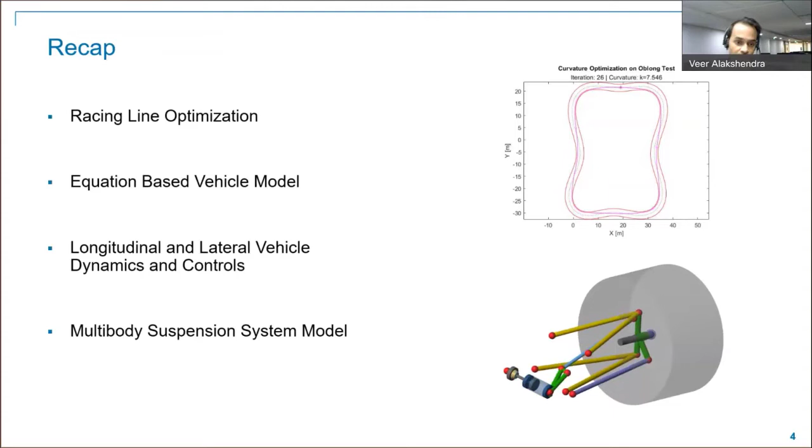So with this, we'll have an exciting and a little bit tight agenda today. So we'll be focusing on modeling of physical systems. Of the whole 1.5 hour session, approximately 50 minutes will be dedicated towards modeling of physical systems, wherein we'll see a very basic battery electric model with motor cooling, which will be based on the fundamental blocks.

And then we'll improve it a little bit, or you can say add more details to the model, where we'll be seeing how an electric vehicle can be powered by a BLDC motor. And then in Powertrain Blockset, which is also one of the toolboxes we have, we have multiple vehicle reference applications which you can use for your different design purposes.

So also, in that we'll check out one electric vehicle reference application. And then we'll see how Simscape, which is, you can say, equation-based modeling, and Powertrain Blockset, which is data-driven modeling, how you can integrate these two.

And then Krishna will come with his full vehicle simulation, and he has a lot to speak and a lot to show, and also he has a very nice introduction of himself. And then we'll share some resources, and then we can take some questions.

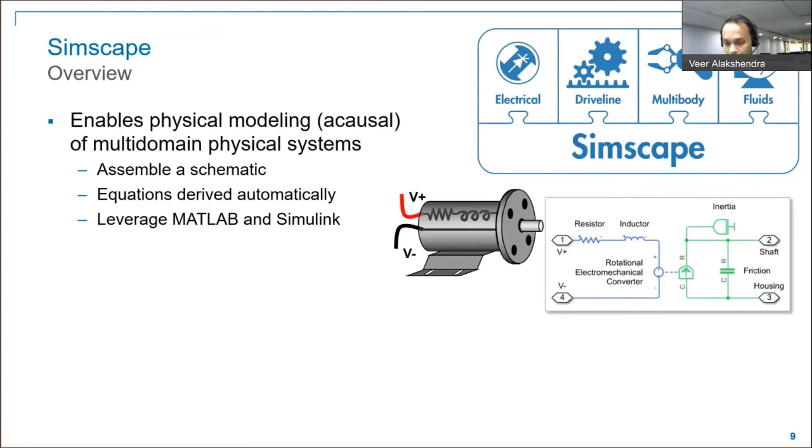As an example, here is a DC motor where you can see these elements. These elements already have the equations. You don't have to derive them from scratch. You can connect them the way you connect in a real environment. We are giving you a lot of different physical blocks in the Simscape library, and if you want to customize them, you can use Simscape language. For example, here we wanted a lossy ultracapacitor, a custom-made block, so for that you can use Simscape language.

So the important points are that it is mimicking the physical system layout in a simulation platform, which is Simscape, and there's an energy transfer involved between the components. Now, once we say energy, the energy flow in this physical system is dependent upon the across and through variables. Now, why are we telling this?

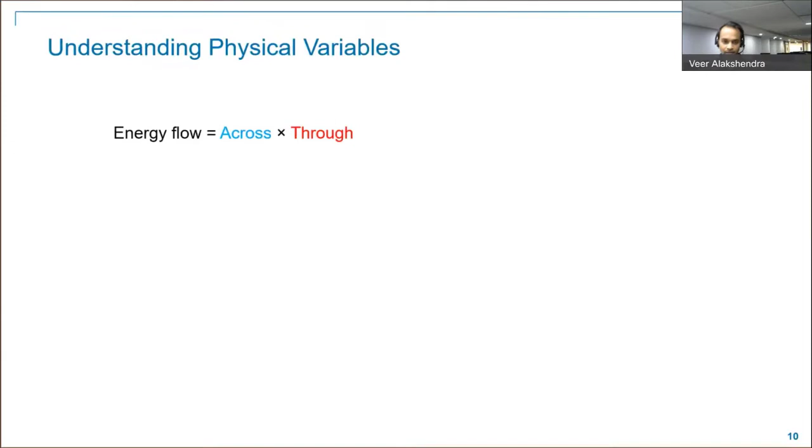Because this is helpful when you are making the connection, because it might happen that you want to sense something like torque, or maybe you want to sense angular velocity. In that case, how to do the connections? So across variables, if you want to sense that, that is connected in parallel, and through, that is connected in series.

So here's one example in electrical terms. Power in electrical terms can be defined as voltage into current, where voltage is across and current is a through variable. So when you want to measure or sense voltage, that has to be connected in parallel. And if you have to measure current, that has to be connected in series. Similarly, in mechanical terms, this power can be defined as angular velocity and torque. And now, if you're making the connection, this is how it will look.

So in the first top diagram, you can see that we want to sense the angular velocity, so these are connected in parallel. And then we want to sense the torque; for that, we are putting the sensor in series. So these are certain basic things, and a lot of other things are also there. Eventually, when we move step-by-step through different models, you'll get an idea, and we'll also share some resources.

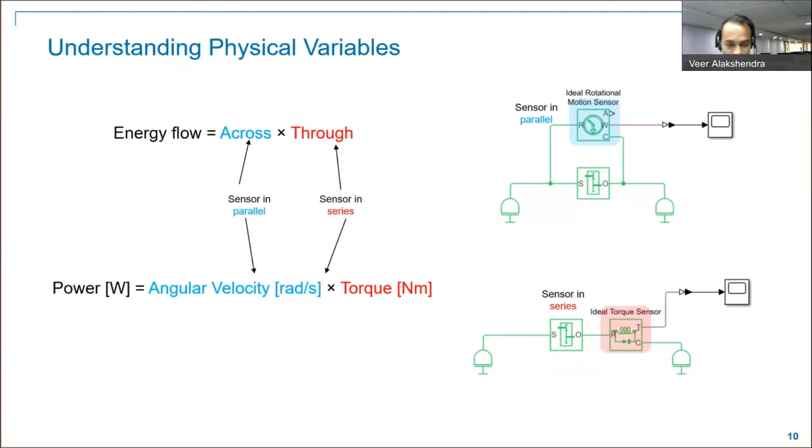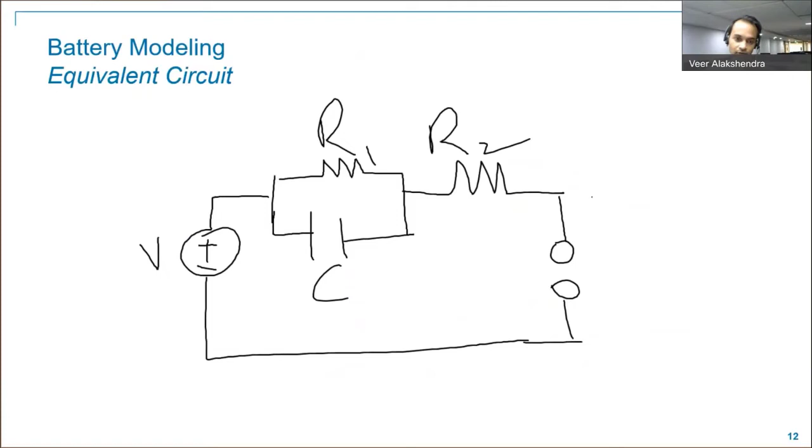Now, what we'll do next is we started with this equivalent circuit model. We are not going to deep dive into battery modeling, but with this problem statement or physical system layout, we'll see how connections are made, how easy it is to make the connections, and a few important things we have covered. Once we are done with this, we'll move to a live demo of an electric vehicle basic electrical model with motor cooling using fundamental blocks. So let's switch to MATLAB.

So let me go through the library browser first, where you can find these blocks. Once you open the library browser, you scroll down. Here you can find Simscape, and in Simscape you have driveline, electrical, fluids, fundamental library, and multibody. In the last session we spoke about multibody, and we touched base on driveline. Since we are looking into an RC equivalent circuit or a battery equivalent circuit, let's get into the fundamental library and see where you can find all those physical blocks or elements.

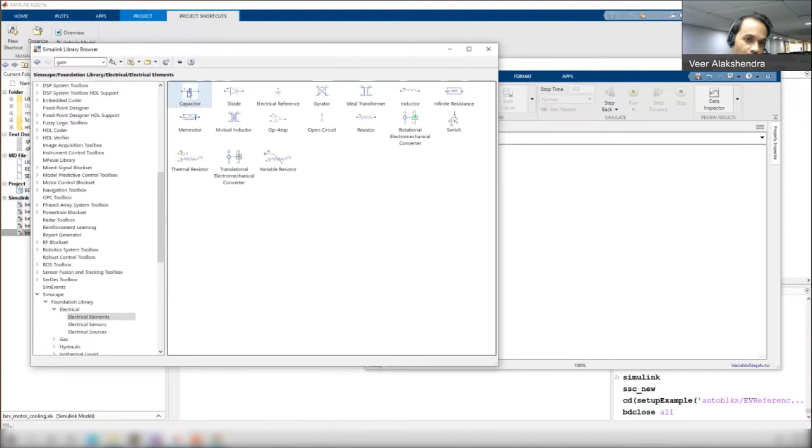So when you go inside electrical elements, you can see that you have these electrical elements: capacitor, resistor, inductor, which are all needed when you're going for this kind of circuit. So now let me do one thing. I'll just add the image in this blank canvas. So if I go to this, and

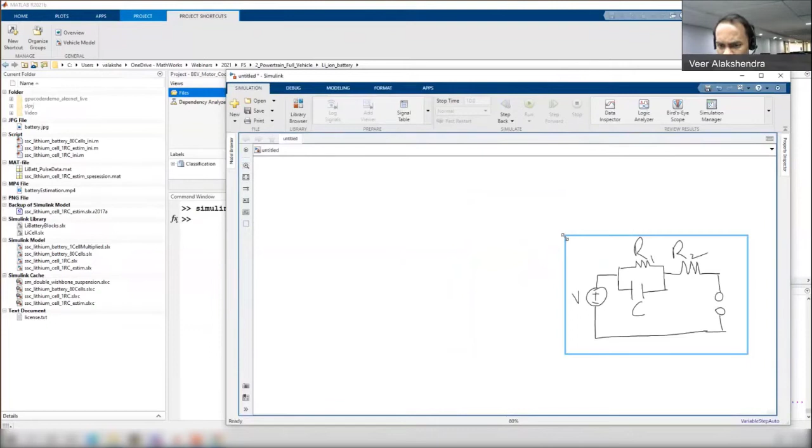So this is just a way to easily build any model. For example, if you are planning to make any model, like this battery or DC motor modeling, this is how the first step should be. If you have a layout of the system or an equivalent circuit, whether it is electrical or even mechanical, like a spring mass damper system, just keep an image, have the library on one side, and keep on adding the different physical block elements over here.

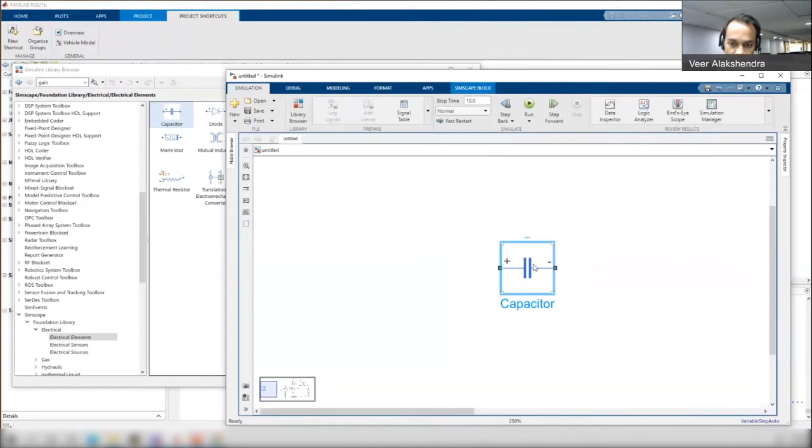For example, I just dragged in this capacitor, and when you double click on it, you don't have to define any equation. What you need to do is define the capacitance and different variables. And one more important thing: whether you use a mathematical modeling or a physical modeling approach, to get realistic results, how you define the parameters is really important.

We have seen students working on physical modeling who have a nice model with all the proper connections, but if you don't feed the correct parameters, it's hard to get proper results. And that makes sense for any kind of modeling method. So we'll bring in the capacitor. Similarly, we'll bring the resistor, and we'll make similar connections over here. Like this, and we'll bring one voltage source, and we'll simply connect it.

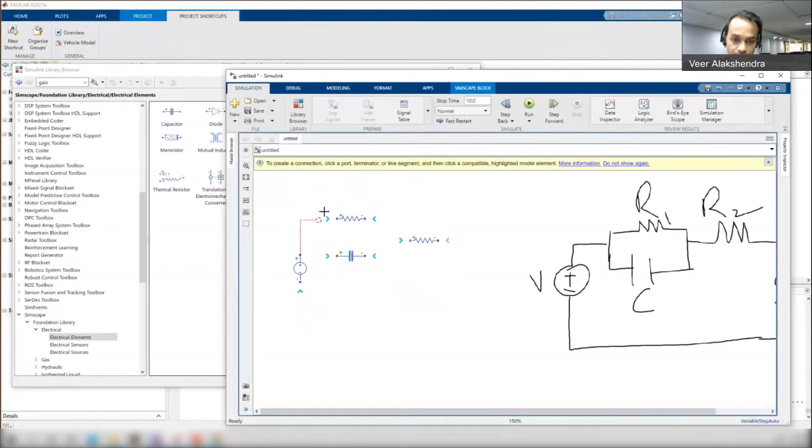So you can see that we're just mimicking or replicating the physical system layout over here. And then you need to just connect to the load. We'll see how we are connecting to different loads and full vehicle. So this is just an example of how easy it is to mimic the physical system layout

over here. So again, we'll take this as a motivation, and when we are moving to an electric vehicle model, we'll show you how, just with this equivalent circuit approach, we have built a whole battery pack, and then how we are simulating it with a vehicle dynamics model. Okay, so this is just a starting.

Now, moving to our main goal, that is modeling an electric vehicle. We'll start with a very basic model using foundation libraries. When I'm talking about the foundation blocks, these are all the blocks coming from here, the foundation library. So now let's move ahead and see what's the problem statement.

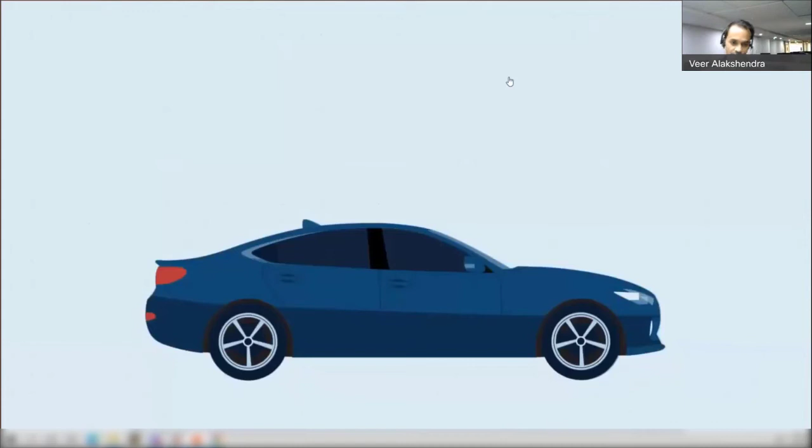So consider this vehicle, comprising a battery, a motor, and a gearbox, and it is driving the wheel, and when it is driving, it has the aerodynamic effect. Now, if you have this model, what can you do? First, you can size the components, estimate the battery performance, study the vehicle performance, or you can also design a motor cooling system.

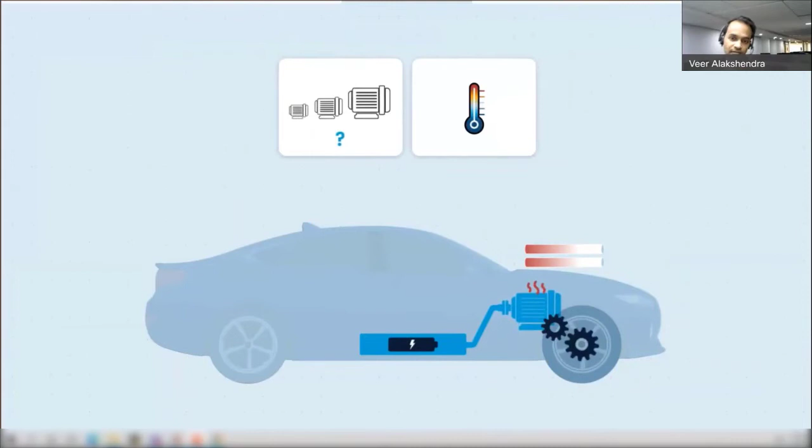So we'll be taking this as an example, and the scenario is something like this, where the vehicle aims to overtake this, and from here you will size the motor based on this scenario. And further, we'll also look into how you can build a very simple cooling system for the motor.

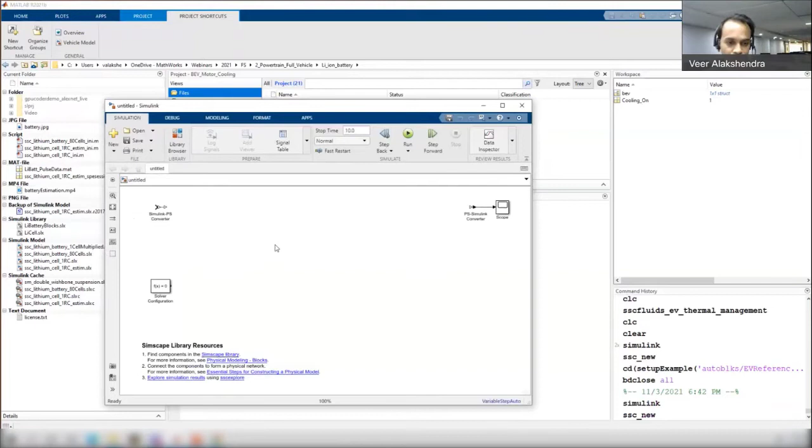So if you're starting with Simscape, either you can start with a blank canvas, or you can type ssc_new and open a canvas with some important default blocks which will be needed when you're modeling it. Okay, we'll come back to what all these are.

So you just saw the vehicle had one wheel rotating, some aerodynamic effect, and a gearbox. So we'll try to make this with a very simple approach. First, we need to rotate that wheel, right? So for that, we'll bring one ideal torque source, where C and R are the mechanical conserving ports. And then we have a simple tire, where again A and H are mechanical conserving

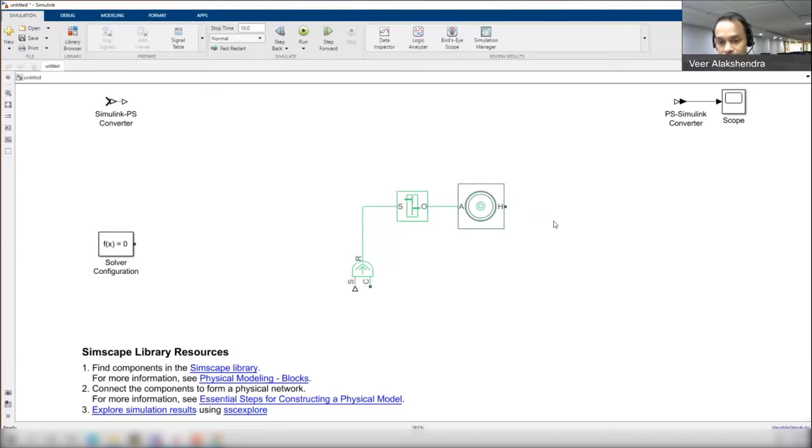ports. Now to vary the torque, we'll add one gearbox. We'll connect one port to the ideal torque source, and the other port of the gear will be connected to the tire. Now, to include the inertia, we'll bring one mass. We'll make this 2-port because we have to make some other connections as well. We'll rotate it and make the connection.

So as we are building it, you can see that we're just replicating the physical world. We want to rotate the gearbox, through which it will rotate the tire, and then we want to include a mass, which is the vehicle. So, a few things. We'll attach this to a rotational mechanical reference,

and then we have to add one constant over here, just adding some constant torque, not the signal, but it's constant. So now if you see over here, there's a change. What is the change? If I type constant, by default it gives you a Simulink block. However, as we already mentioned, these are all built using physical signals. That's why this is a PS constant, physical signal constant, which is connected to this ideal torque source.

Now further, we want to measure the velocity of the vehicle. So for that, we just bring one ideal translational motion sensor. Why? Because we want to measure the velocity. And then we again do the same thing. We connect the conserving ports.

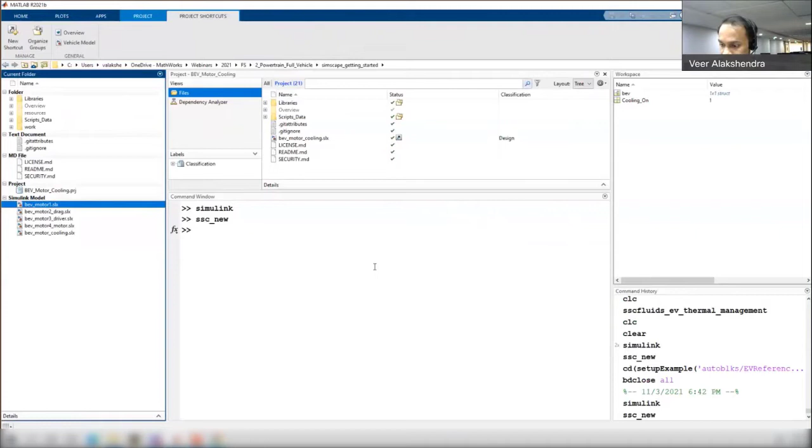Now, we already have the model with all the parameters, because if I again start adding the parameters, it will take a good amount of time. So I'll just close this one, and we will move back to the model which is already there. So now over here, you can see the same thing. We have this torque source, the gearbox, tires, chassis, and everything. Now let's run this model.

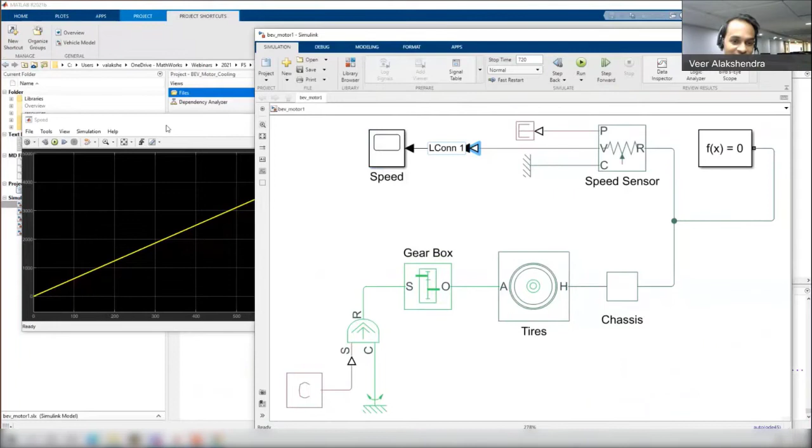So if you run this, you can see that the velocity is continuously increasing. And one more thing I forgot to mention is that when you're connecting these Simulink blocks to Simscape using these converters, you need to define the output signal units. For example, here we have defined kilometers per hour. And you can see that this is way too fast. You won't be able to drive with this velocity.

So now what is missing? We are missing the rolling resistance, the inclination effect in the vehicle, and even the drag. So we'll add two more blocks to include that resistance. Going to that model. So now with that improvement, we have added a block called translational friction, which is accounting for the drag. And for the inclination, we have added one ideal force source to which we are giving some constant value.

Now let's see what happens. Okay, one second. So now you can see that the effect is much better. After 400 seconds, you can see that the vehicle is approaching a constant velocity. What do you think? Is it fine, or do we need to make some changes? You can type that in the chat box.

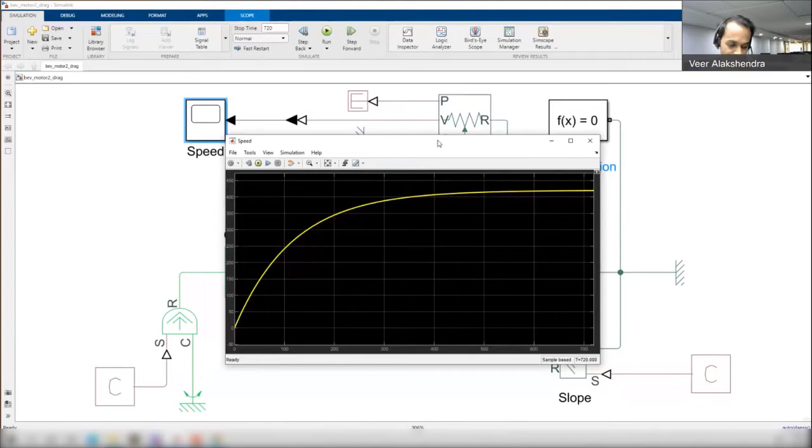If you're looking at the model and the results you're getting, what do you think could be wrong in this model, or is everything fine? Gear shift effect. Okay, Aditya says gear shift effect. Okay, so what is the effect of suspension? Yeah, coming back to the suspension, we have not added suspension, but still, at your basic modeling, you can add a few more things. The major concern over here is this part. You can see that the vehicle is moving very fast.

So if you remember the scenario we are talking about, the vehicle has to overtake the other vehicle in one lane and come back to its original lane. So here we'll try to control the speed. For that, we'll add one driver, which is dedicated to that kind of overtaking.

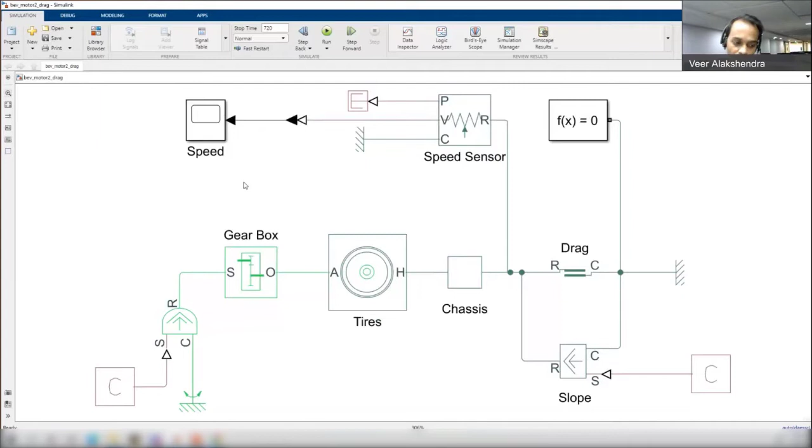So going to that model, to the driver, over here, just so that you don't confuse, this driver model is not a part of any toolbox, or not a part of any Simscape block. It is just created using Simulink blocks. So if you go inside this, the task is controlling the velocity. Now this driver model currently has 200 Newton meter torque.

Now let me run this first. And now you can see that, to some extent, it is fine. It is having 100 kilometers per hour over here, and then it is increasing the velocity when it is overtaking, and then it is coming back to constant.

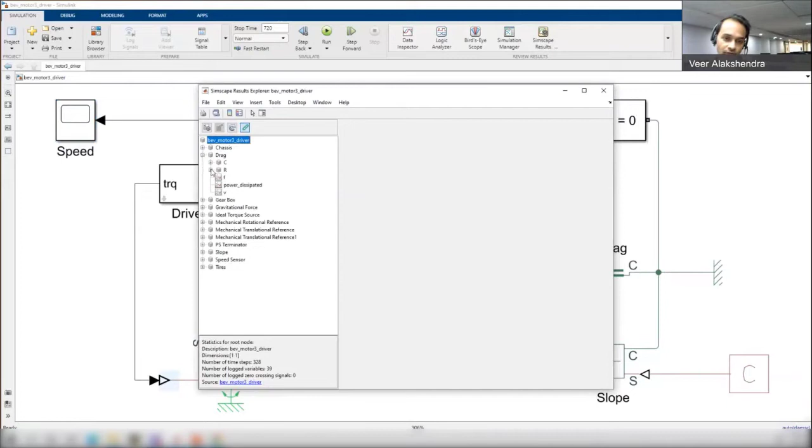Okay. Now, coming back to the component sizing and selection, which still is a question: if you want to select a proper component or motor for this, you have to visualize the torque. What is the torque output? For that, you can use the Simscape Results Explorer, where you can explore the results from different Simscape blocks with respect to time. So if I go to gearbox, and let's expand it.

Okay, I closed that window. Okay, let me again start that. So over here, you can see that it is taking close to 15 seconds or 14 seconds to overtake, which is a good amount of time.

So the first problem was controlling the velocity, which we did by just adding one driver. And then if you want to reduce the time to overtake that vehicle, let's increase this torque. So if I increase this torque and run the model, and then again visualize the results, let's see what happens. So now you can see over here that this is much better. Now it is taking less than 4 seconds, which is perfectly fine.

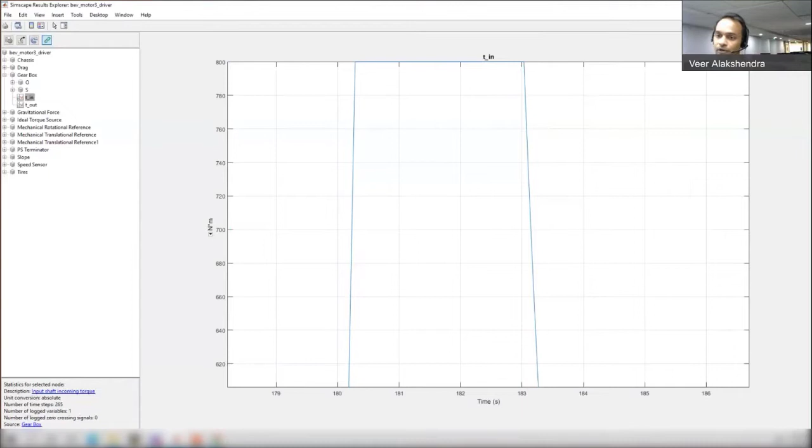Now the whole conclusion of the story is that when you have certain targets to achieve, based on that, you can build the model, and then you can size the components. There could be a lot of other parameters; I'm seeing in the chat people mentioning drag, then lateral dynamics. There's a lot going on. But overall, this is the procedure when you're looking for component sizing and selection.

Now with this, we understand that we have to select a motor which has a maximum torque of 800 Newton meter. So that's what we did. In the next model, we have added one motor, wherein you need to define certain parameters. This motor is designed based on velocity and torque. Once you have defined them and run it, you can see that it is within the range, below 5 seconds, and fulfilling all the requirements.

So we started with a very simple basic model. It is still a simple basic model, and we saw how we decided what the specs should be for the motor selection. So this is one part of the model. Now, okay, there are a lot of questions.

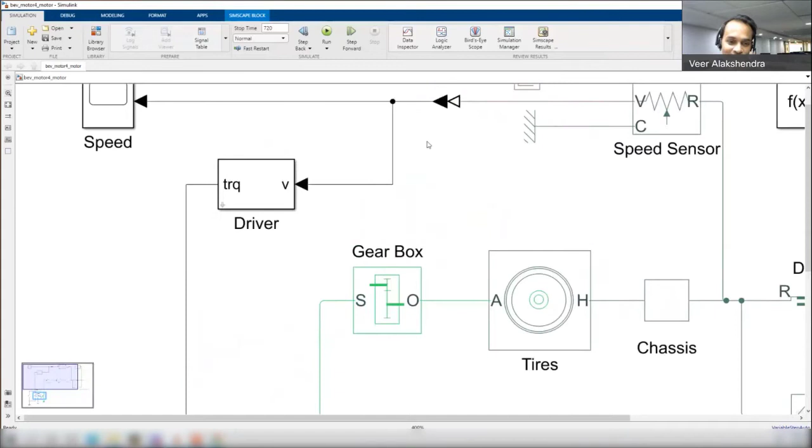Okay, one I can take. Why connect driver between scope and PS converter? This question was asked, I think, two times. The reason is that this is completely built in Simulink. So we want to input the Simulink signal, which can be done using this converter. And again, we want to give back to the motor over here, which requires the torque as a physical signal. So that's why we are using another converter, the Simulink to physical signal converter. That's why we are connecting it.

So you can definitely keep on asking questions. Once we are done with the session, we can come back and go through them. So having said that, we just saw the model, and now another task which we already spoke about was how to add the thermal effect, or how to design a cooling system.

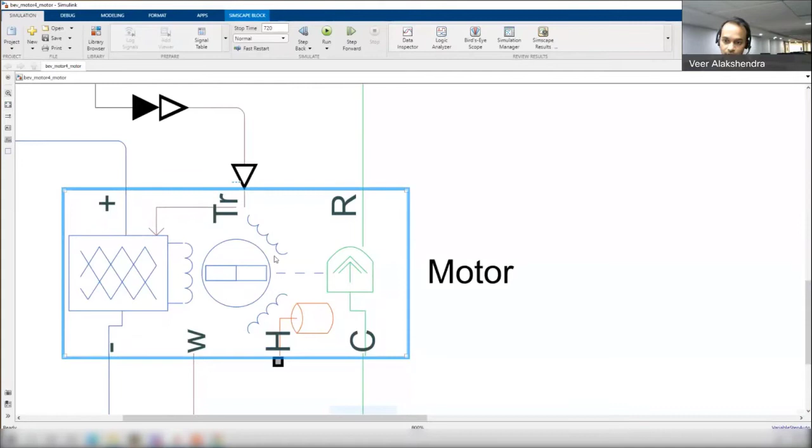Now, at least even if you're new, you got an idea that what you see in the physical environment or real environment, that's what we are trying to replicate over here. So with that learning, and one more hint I'm giving over here: this H port, what you see on this, is the thermal port. When you double click on this, you need to define certain things like thermal mass and initial temperature.

So now suppose we want to add one cooling system. What components would you need? Or maybe before that, what kind of different heat transfer will take place from the motor to the environment? What are the different modes of heat transfer? If you have that answer, I think it's very easy to understand when you're modeling the physical systems.

Okay, Mayur says convection. Okay. So there's one interesting answer: conduction and convection. Nice. Just on a simpler note, I think most of you are correct. Of course, convection will be there because it has to dissipate the heat into the environment. Through the fluid state, it will be convection.

And then conduction will also be there because the motor will be in a certain casing. That is heat transfer through a solid medium, so it will be conduction. So when you're adding that thermal effect, it will have conduction as well as convection. With that, we'll go to the final model and how it looks.

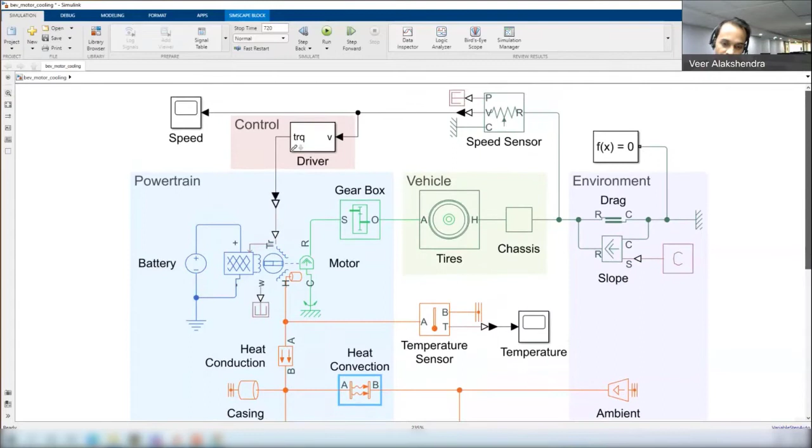Now further, to cool it, here we're talking about liquid cooling. So what we have done is we have added two pipes. This is a pipe casing which is connected to the casing over here, through which the fluid will be going, and then to dissipate that heat, we are connecting that to the ambient temperature, or you can say the atmosphere.

And then there are certain blocks for the tank and pump, and to define the fluid properties, we have one more Fluid Properties block. Now, once you run the simulation, what you see over here... Ahmed, can you send the model? Yes, we'll send the model. We'll show you something interesting, where you can find the model.

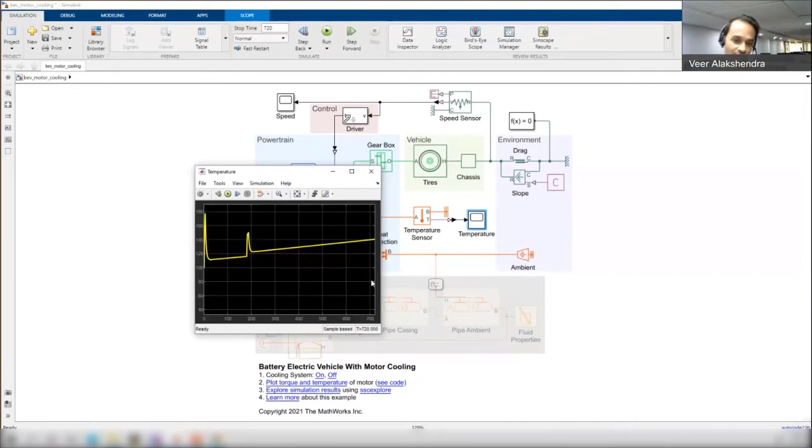Now, I just switched off the cooling system, and let's check out the temperature. If you have some threshold value, something like 120, you can see that it is crossing, and the temperature of this motor is increasing as time increases. Now, when you add this cooling system, let's see what happens.

Meanwhile, there's one question I can answer: what Simscape libraries are needed for the model with cooling. Along with what you saw, we made some blocks using the fundamental libraries, but otherwise you need to go into Fluids and check out these blocks, where you can find these pipes and all. So now I switched on that cooling and you can visualize over here

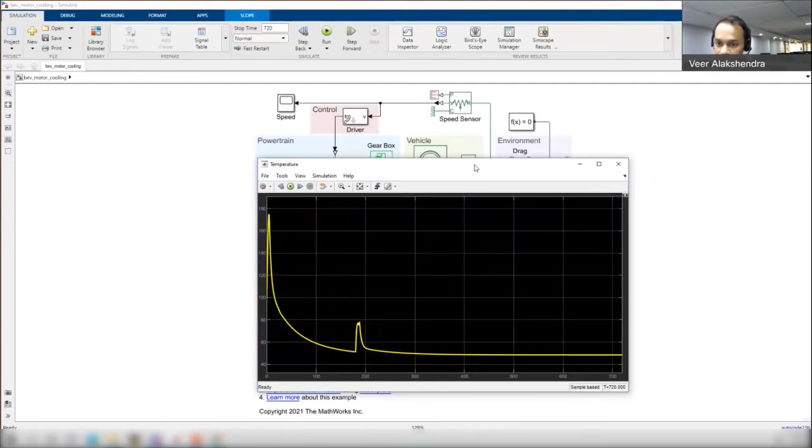that this is within, okay, no, not this. So now you can see that this is below the threshold point and we are able to cool the motor. So this is, I would say on a very basic level, the model. And now we'll move into a more detailed electric vehicle model where you will see how we are adding a specific motor and battery as well.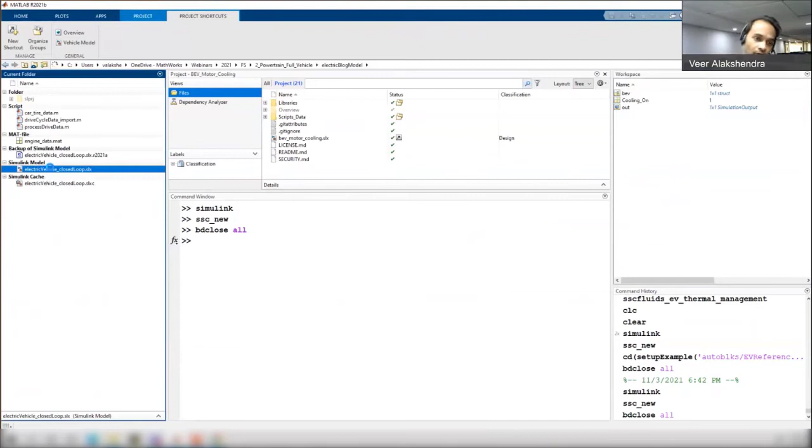Okay, so yeah, we'll just quickly run over one more model which has more detailing, because when you talk about the electric vehicle model, you have DC-DC converters, you have motors, specific motors.

So now you can see over here that when we go to the vehicle block, we are not modeling it using mass and drag using a friction block. Rather, we have a dedicated vehicle body block, where if you double click on this, you can see that this block is incorporating the equations, which have mass, number of wheels per axle, CG height and everything. Now, it also takes into account the drag, pitch, and all.

So this is one block, and then it has certain connections for the tire blocks, the brake as well, and putting an inclination. Now, with this recent release, we have one more interesting block in the driveline, which is called longitudinal vehicle, which also incorporates the tire effect. So you don't need to separately connect tires like what you saw in this model. Okay, so you can also have a look into this one.

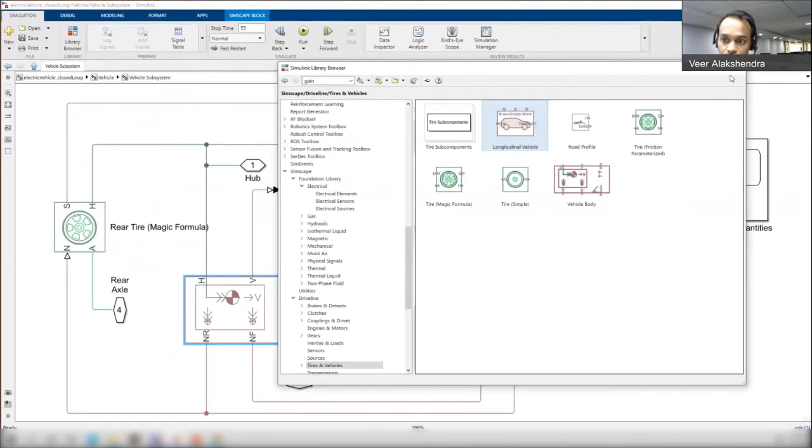And further, if I go ahead, you can see gear systems, which are modeled using these friction clutches, and based on that, we have certain logics. And then as we mentioned, the battery pack. So if you go over here, you can see how we have utilized an equivalent circuit model to make one cell, and then we have connected that to make a whole battery pack.

Okay, just to confirm, is my screen visible to everyone? Okay, so you can see the screen. Okay, fine. Okay, perfect.

So we're talking about the battery model, how we utilize the single cell equivalent circuit into a whole battery pack. And then coming back to the motors, now we are not using the motor which is built using torque and velocity values. Rather, we have a BLDC motor. Similarly, you can have PMSM motors also. You can check the Simscape library and see what other motors we have.

And then we have also built one DC-DC buck converter to step down, and then a three-phase inverter for this one. We're controlling the switching pattern using commutation logic. So from a learning perspective, you can start with a basic model, and then as you proceed further and understand the concept of physical modeling in Simscape, you can add more details into the model.

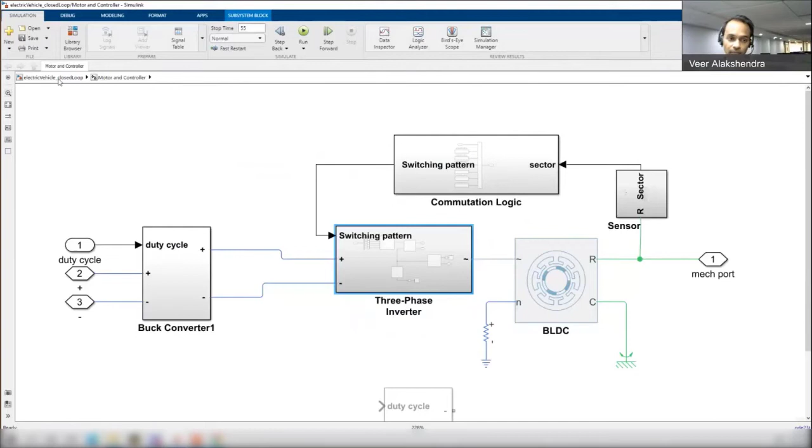Now, how can this model be used? For example, in Formula Student competition for component sizing and selection, if you are sizing your battery or selecting your motors, you must have some kind of drive cycle. You can have that drive cycle over here, add one controller, which could be a simple PI controller, and then you can see whether the powertrain you designed is able to track that velocity or not.

Similarly, you can also optimize it. For example, you can run certain optimization to find the parameters of this motor. So we wanted to show over here how you can increase the fidelity. And if you want more high fidelity models, we would recommend you check out this resource, the Simscape vehicle template. We also spoke about this, and we took one model from this and demonstrated it in the last session, the suspension model for the Formula Student teams.

And you can get a lot of information from this, because it includes one axle, two axle, multi-axle vehicle models, with powertrain and vehicle dynamics as well. Okay, so you can explore this. We have provided the link over here, and feel free to use these models for your specific requirements.

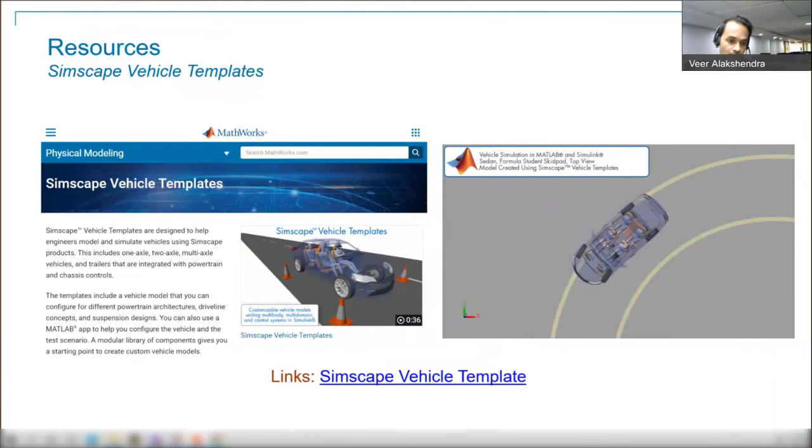Perfect. So quickly, what we will do, since we don't have much time and we have to give it to Krishna: until now, we just spoke about the concept of physical modeling. We also have one more tool called Powertrain Blockset, with the goal of providing a starting point for engineers to build good plant and controller models and provide open and documented models.

For example, this toolbox has a good amount of reference applications. You can use those reference applications by changing variables, or if you want to make any changes to any of the blocks, these blocks are all open. And of course, for those who are looking for HIL testing, it provides very fast running models for that.

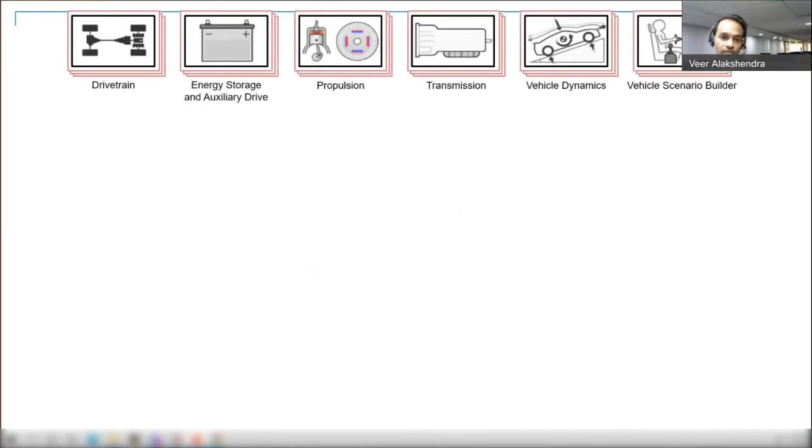Now, what is this Powertrain Blockset? It provides you different libraries for drivetrain, energy storage, propulsion, transmission, vehicle dynamics, and vehicle scenario builders. And you can combine these models to, for example, build one engine model, and then that subsystem can be added to a complete full vehicle simulation, and then you can visualize the results or do the analysis part.

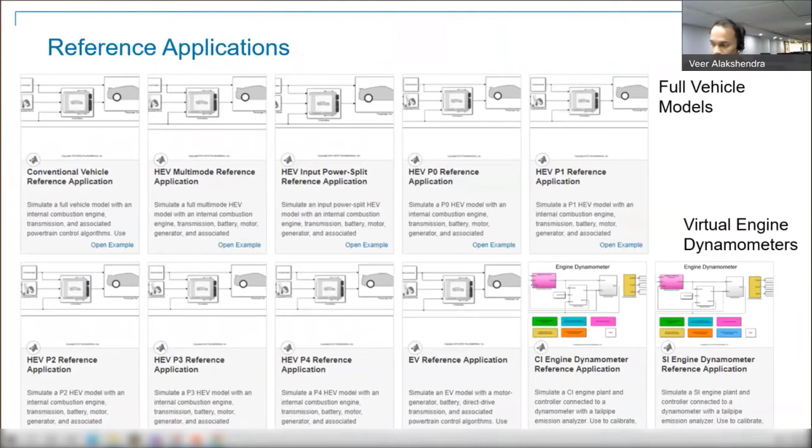So these are the whole set of reference applications over here. These are full vehicle models, and we'll just check out one example, the electric vehicle one. And if you are looking for virtual engine dynamometer testing, you can also check out these reference applications. One is for CI engine and another one is for SI engine. So I'll quickly just open this model and show you how you can leverage this model for your specific requirement.

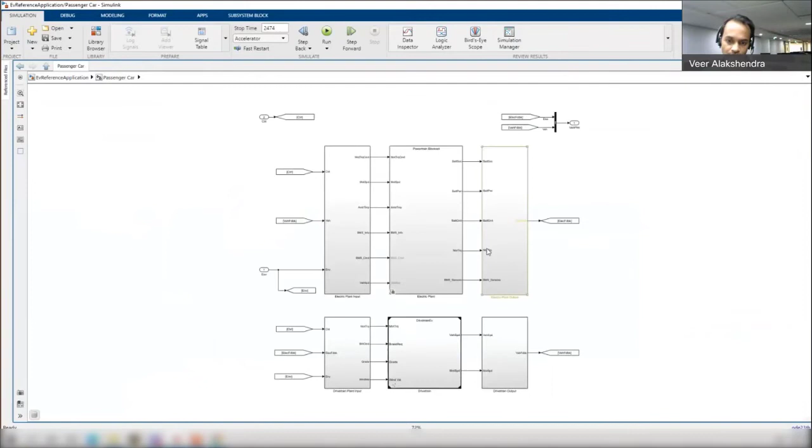Yeah, so this is the model. What you see over here is it has a passenger car with different subsystems. And if you go to the passenger car and you go to the electrical plant, you can see how the powertrain has been built using blocks from Powertrain Blockset. For example, if I just take the example of the battery, this is the block which is present in the Powertrain Blockset. Again, over here, these parameters you need to define to model the battery.

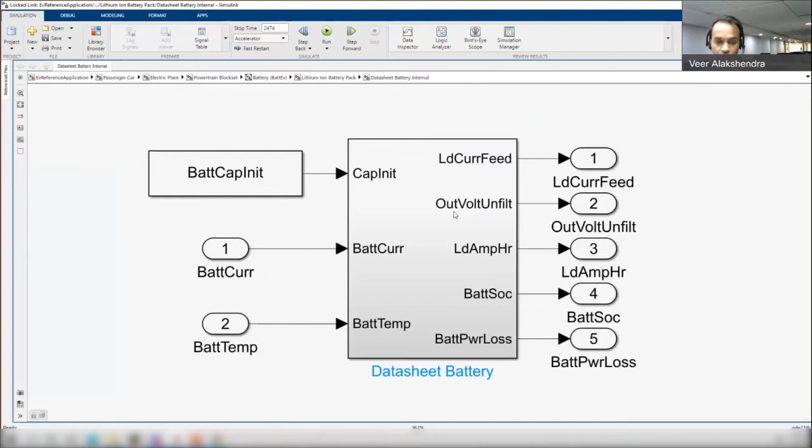And just to remind you again, these are not physical signals. These are based on Simulink, based on equations, and you can see that they have directions, so you can say input signals and output signals. Now, if you want to change it, visualize what is inside, or customize it based on the existing blocks, you can simply go inside, press Control U, and see what equations are being used. So it's completely open. You can modify it, or directly use the reference application. Similarly for the other components as well.

Okay. So now this model, if we run it, will take some time. Since we don't have much time, I'll just quickly mention that this is a closed loop model. It has a reference drive cycle, the FTP75 drive cycle. For this, we are running the model, and you can see how smoothly it is tracking, and then you can also calculate other parameters like state of charge for this electric vehicle model.

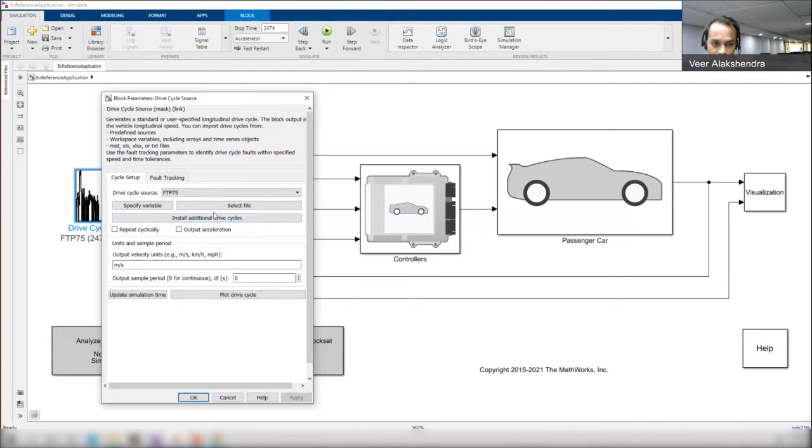And we often get a lot of questions regarding whether we can have other drive cycles. So if you just click on this install additional drive cycles, it will route you to one of the support packages or a submission on the File Exchange. From there, you can get more drive cycles for testing.

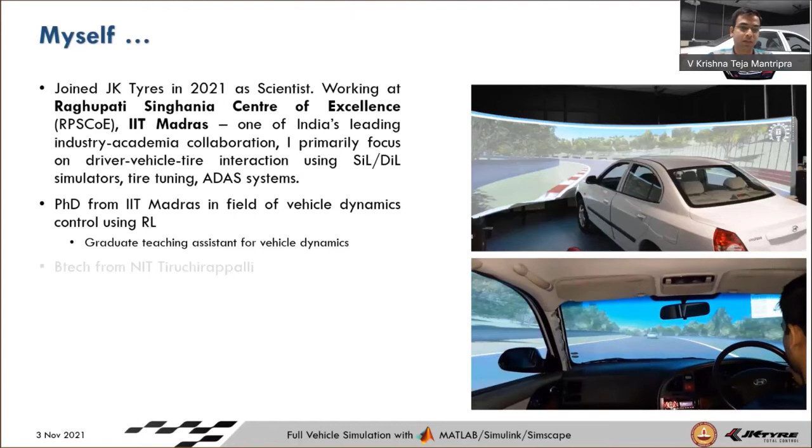So just to give you a feel, this is a view of our lab, and at the bottom you can see me driving the hardware in loop, or basically you can call it a driver in loop system as well. And the car that you see behind is the same thing basically. But this requires extensive parameterization, extensive modeling, and all that stuff. And these are some of the things that we are going to explore in the forthcoming slides. In a few minutes, we're going to see that.

So Veer has already given you a very good basic understanding of the difference between equation-based, that's on the left side, and physical model, that's in the center. But the physical modeling is again categorized as 1D and 3D, because in 1D you do not have gravity or any other inertial effects and so on. So that is where we go into 3D to model even more details, in combination with 1D simulations as well. So this is what we're going to explore more in detail.

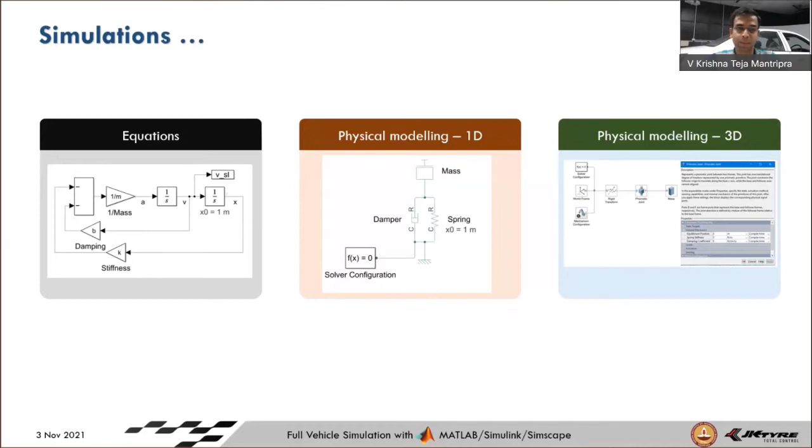So the simulation model has all the subsystems that you see, from the chassis, the suspension, tires, brakes, steering, maybe power steering as well. Today everything is electronic power steering. If you go to German vehicles, European vehicles, they do not have a mechanical steering as well. It is called steer by wire. So everything is replaced by wires. So how those can be modeled. And powertrain is already covered, so I will just go through the basics.

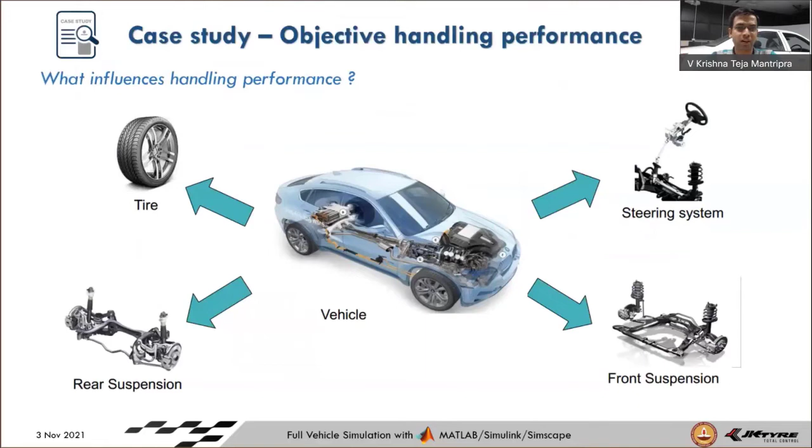And formula students might be interested in aerodynamics, so I'll just give you a brief of how you model aerodynamics. Extensive modeling can be done, but here I'm going to just touch the basics. So to give you a feel, I'll first run you through a case study. The case study is regarding objective handling performance. Handling is extensively dependent on these subsystems: tires, suspension, and steering system, of course. Vehicle level parameters and other parameters are not very well felt, but these are the main parameters.

So for these performances, for example, a new tire is going into the market or a new vehicle is going into the market, it needs an extensive validation, not just on the sensor side, but also the physical feel of the driver, that is, the subjective rating which the driver himself gives. So we require different metrics from individual components, and overall metrics of the vehicle itself. And the challenges are pretty big. We need a full vehicle CAE simulation and overall process efficiency in data collection, modeling, simulation, testing, and so on.

The biggest challenge is which physics to model and which we can omit. So the trade-offs are huge. These are the things that we need to address before. And once these are done, we can actually have a correspondence map, like which performance metrics are affected by which parameters. That is what we are going to see in the course of this presentation.

So first, we are going to measure the tires. On the left, what you see is called a traction trailer or skid trailer, which measures all the tire forces and moments under different conditions. This is a skid trailer that is available in India. It is the first that we have purchased and we use it extensively for tire measurements. Next, from those raw data we estimate all the tire data, again using MATLAB, as it has extensive optimization and estimation techniques and codes built in, so we can directly leverage them. Finally, we perform the simulation, full CAE simulations, as you can see on the slide.

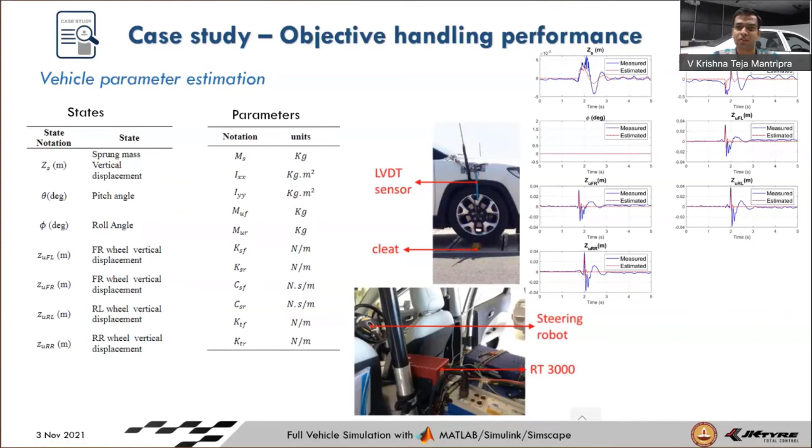The next important part is the steering estimation, where the models are quite obscured, because it requires a lot of custom models to use them. I'll explore some of them during the course of the presentation. How can you model such things in MATLAB easily, again without having to worry about a lot of equations? Simscape is there to alleviate you from all of this.

So the blue one is on-the-road testing, and the red one is from the simulation models that we do. On the right side, what you see is a steering robot, which gives specific inputs repeatably on a test track.

So with the mix of all these things, now we know the tire parameters, the vehicle parameters, the steering parameters. So it is like we are making a digital twin of the complete vehicle system. Only once we have all these parameters can we actually verify or validate vehicle-level data. For example, here it is lateral acceleration versus the steering wheel angle, with different tires; if tires change, the behavior also changes.

On the right side is the same car you see behind. So you can sit inside and drive, the driver actually drives, and we can mount the same steering robot to repeat all the tests in the hardware-in-the-loop system. So we can have a very good correlation.

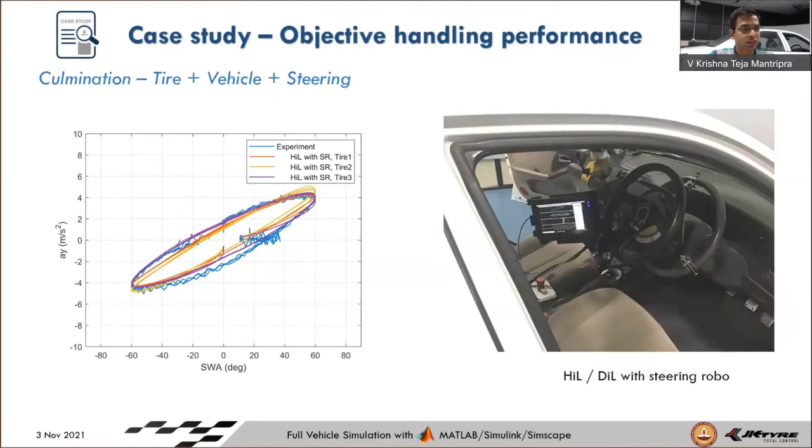Krishna, you can see the chat, right? I mean, what they're writing as answers? Can you see? The chat is not visible for me. Oh, okay, no issues. So we got two answers. Yeah, I think the screen has slipped up. Okay, fine, you can see it, right? Okay, fine then.

Yeah. So on the right side, the second graph, what you see is the steering handwheel versus lateral acceleration. So there are a few thumb rules. If you are in a racing team, you might know many of those things. One thumb rule is that at a certain speed, if you give a certain steering angle, it should reach a certain lateral acceleration. For most passenger cars, the thumb rule is at 60 kmph, near 60 degrees, you need to be able to reach about 4 meters per second square, 0.4 G.

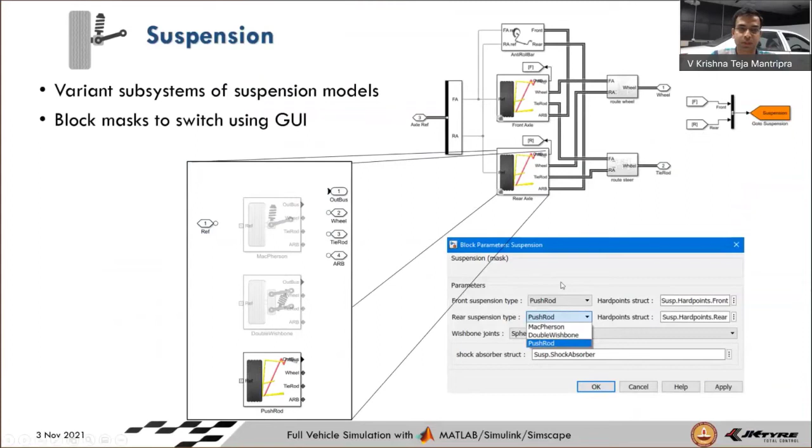So how do you model these suspensions? This is a schematic diagram that we have. If you closely look, we have an upright, two wishbone pairs, one at the bottom, one at the top. Near the lower wishbone, we have a push rod coming up, hinged at a point here that is connected to a shock absorber. This yellow and pink combination that you see is the steering rack, which will come in a minute.

And the green one that you see is an anti-roll bar. Of course, this is one type of anti-roll bar. You might have something embedded within the chassis itself, but for simplicity, let's have this one as the anti-roll bar. So these are the bodies that you know. And now intuitively you know that each of them have certain degrees of freedom. For example, the wishbone can move in certain directions or can rotate in certain directions.

So you need to use a ball joint. Typically ball joints are used. You can use even revolute joints. Simulation speed will vary because, if you studied multibody dynamics theory, you know that some of the constraints you can remove, and the results will be pretty much the same. So if you can properly translate the 3D coordinates, you can use either a ball joint or a revolute joint.

Bushing joints can be used. That means all 6 degrees of freedom can be used to additionally model the vibrations, but simulation time will increase. It is called judder, because of variations in road surface, tire forces, and so on. You feel the vibrations, which the driver feels in his seat and through his steering. All those can be modeled by using different degrees of freedom. All of those degrees of freedom blocks are available in Simscape Multibody. So that is about the wishbones.

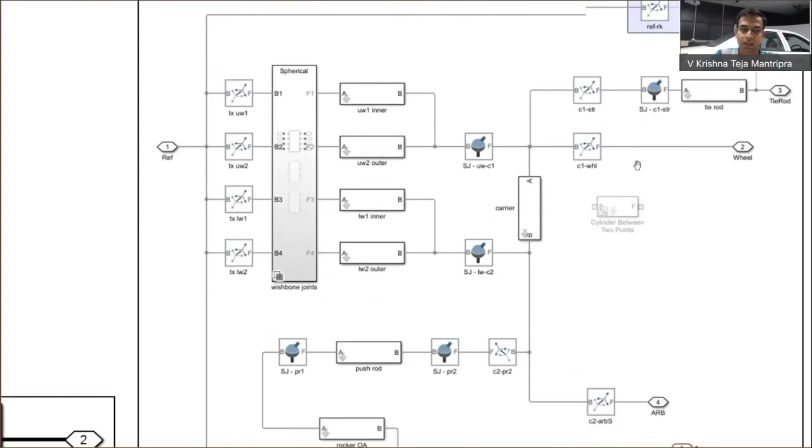I have the wishbone rods, the yellow rods that you have seen in the previous slide. They're connected to, again, either bushing or spherical joints, because on the upright you need them to be connected. So that is the carrier or the upright, connected to the tie rod of the tire, that is the steering. And connected is the push rod.

So you have the push rod; because it has rotational degrees of freedom, you have again spherical joints connected. There is a hinge in between, that is the rocker, and at the center of the rocker again it's a revolute, because the rocker does not rotate in other directions. It rotates about only a fixed axis. So you have a revolute joint there. There are 2 arms for the rocker, upper and lower, so you have 2 of them.

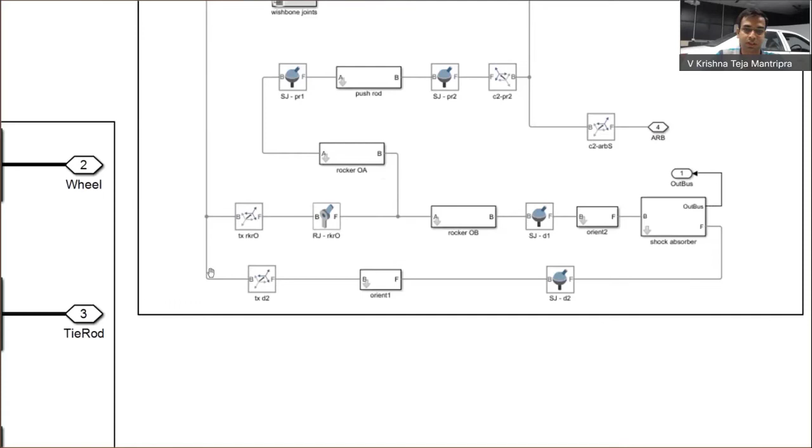It's connected to the shock absorber again via a spherical joint. The other end of the shock absorber is fixed to the chassis. So that sums up how you build a very simple kind of push rod suspension. Shock absorber will come in a minute. So for left and right, simple. Don't have to model anything, just copy and paste the blocks. Everything is replicated. You just need to switch from plus y to minus y to make left and right together.

Now coming to the shock absorber, we have seen previously that these joints have some compliance in terms of spring and damper. But what if the springs and dampers are not linear? What if they are non-linear? We cannot give those values in the dialog boxes. So we have something called interfaces. This is a translational joint I'm taking because the damper is expanding, so I have an interface. So I connect spring, damper, and a hard stop to tell that it is the limit of my damper, it cannot move.

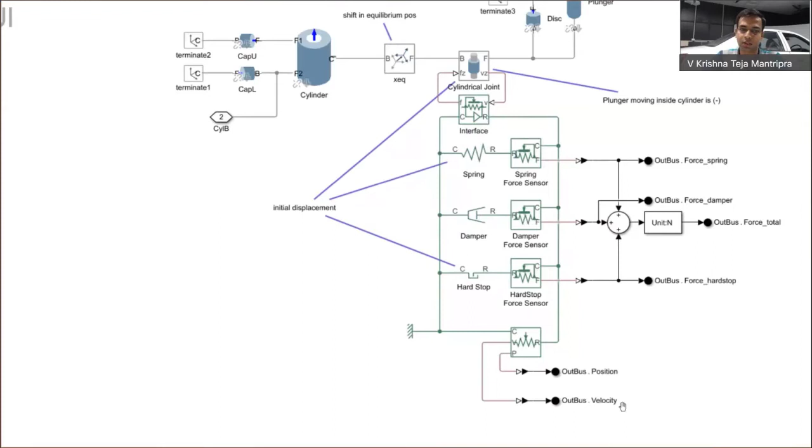And you see force and position sensors. Basically, these are through and across variables that I'm measuring, as talked about in the previous presentation. So the sensors have corresponding meanings as well. Force is through the element and displacement is across. So I have position and velocity sensed together. These are inertial bodies to give you the inertia of the suspension. So that covers the shock absorber.

In terms of the anti-roll bar, I have again the same reference point. From the reference point, basically you can rotate, so we have a revolute joint there. When you're cornering, the load is increasing on left or right, and on the other side it is less, so there's a torsion developed in the bar. Torsion is about one axis, that's why you have a revolute joint, and there's a compliance inbuilt. Here I consider it as a linear spring and damper, so I just gave inbuilt parameters. If you have a more detailed one, you can use that.

Left and right arms that you have seen previously. So L joint, L body here and L body here for both left and right. It's connected to the chassis, or to the wheel basically, of this strut. So that is about the anti-roll bar.

So the modeling principle for other kinds of suspension is the same, just that the bodies will vary and maybe degrees of freedom will be less, because if you take MacPherson, we don't have an upper wishbone, so we have fewer bodies and fewer joints. But the principles are the same.

Moving on to aerodynamics. It basically depends on what fidelity of model you are looking at. I have forces and moments in 3 directions, and for each of them I have lookup tables of the coefficients. If you want more detailed modeling, you have Aerospace Blockset, which models all of these in more detail. But more detail comes with a trade-off of more parameters. If you're able to get those parameters, you can use the aerospace toolbox to model all of them.

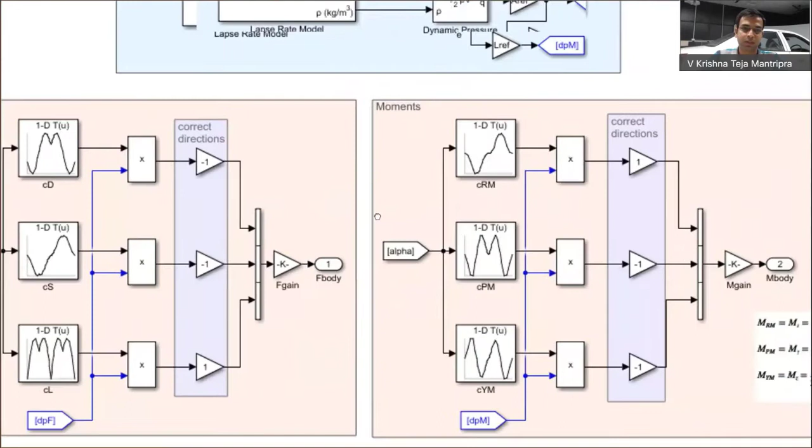And these are based upon angle of attack. So this is called 1 degree of freedom aerodynamics. You have 2 degrees, you have 3 degrees, and even more complicated models that are there. But this is the simplest one that you can come up with, and it actually works pretty well.

So this block that you see is again from Aerospace Blockset. If you have an altitude and your pressure is varying with respect to altitude, this block absorbs all those things and gives you the proper dynamic pressure that needs to go into the aerodynamics equation. So that is how simple aerodynamics can be. More details you can find in the examples from Aerospace Blockset. There is a flight model which gives you more details, so you can refer to that.

Next, moving on to powertrain. The current model that we are going to see has the following powertrain models. The principles are the same, but the additional components are what give them more fidelity, depending on how you design or characterize your full vehicle, whether you want a front wheel drive, a rear wheel drive, or all wheel drive in terms of 2 differentials, or individual motors called hub motors, and battery with heating. Motors and battery with heating and with a cooling circuit for the overall: that is 2 motors plus battery, all of them thermal components along with cooling.

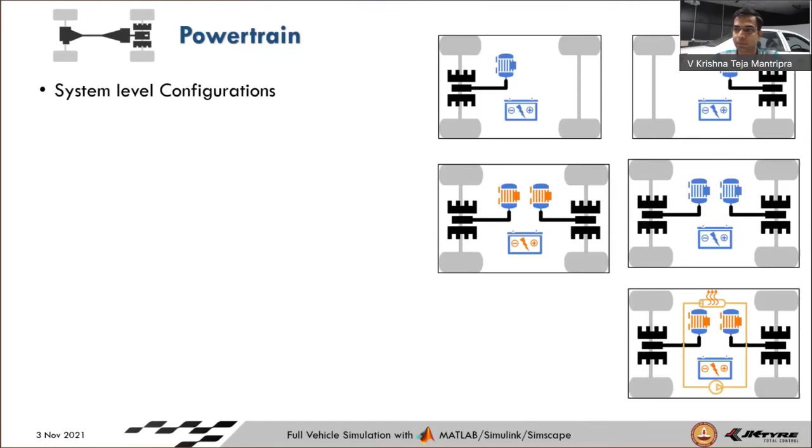And what you see here is a battery where I'm measuring the charge. You can also measure the SOC, the voltage that is dropped because of consuming power from the motors, connected to a DC-DC converter, 2 motors, and I'm connecting to something called a Simscape bus. Many of you might be familiar with Simulink buses. There is something called a Simscape bus as well. You can feed the physical signals. Simulink signals will not go through; only Simscape signals will go through. And their domains are conserved.

So if you input a mechanical domain in, you will get the same mechanical domain output. You can mix and match basically. It need not always be mechanical input. You can give an electrical domain into the same bus, and at the output you can pick up all of them as is. I'm using these so that I can use them in the variant subsystems that I've shown previously, and you can choose which is suiting you best. So it helps in making your decisions better.

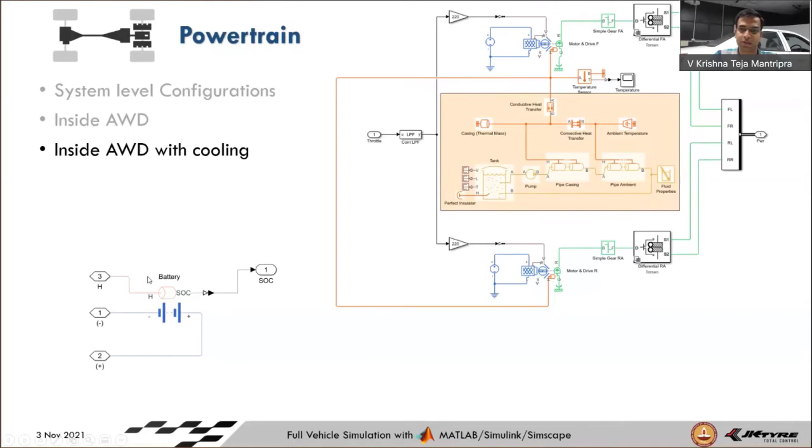With the cooling system, same thing, but now the motor has a thermal mass and it is dissipating heat via conduction, convection, and there's a cooling tank around it. Rest everything is the same. Same thing for battery. You again have a thermal block for the battery. Thermal ports are available for battery. Again, it requires more extensive parameterization. Some of them you can find from the data sheets, but for others you might have to do some kind of experimentation to validate your data. So that is a quick overview of these subsystems.

Next, I'm going to take certain things in more detail. Why I'm going to take tires in more detail is because it's not just on a subsystem level; it affects the whole range of performances. For example, on the right side you see what the tires affect. It affects the mechanical behavior, the acoustics, that is the noise and the comfort levels that you feel, steering and handling comfort, stability, aquaplaning, that is when you're driving on wet roads or icy roads and so on. So that is aquaplaning, wet and winter.

If a tire is worn out, your vehicle behaves completely differently. Or if you have all 4 tires of 4 different brands on a vehicle, God be with you, something might happen, because generally they are not compatible in terms of handling. It's not unsafe in general, but it is unsafe for neophyte drivers.

Expert drivers might be able to manage with such kind of situations. Then noise and fuel consumption. Fuel consumption is a very huge topic, especially with electric vehicles coming in. It's a big trade-off. If you put lower rolling resistance, that is a dissipative force from the tires, it's a tough choice because yeah, your battery might be conserved, but you won't have the grip on the road.

Your brakes, even if you brake hard, the vehicle skids, but you won't come to stop easily. On the other hand, if you increase the grip, rolling resistance increases and your battery life will go down. So it's a very careful trade-off. So basically, the tire affects the entire spectrum.

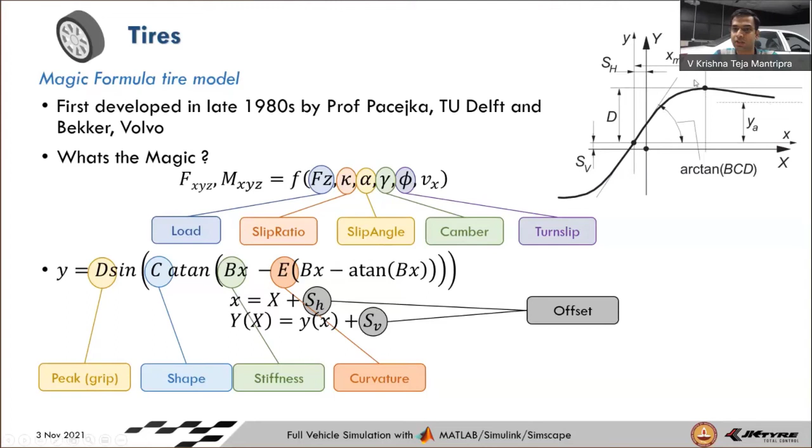So it is cornering test with camber. Not only that, it can do pure slips. This is a pure slip that we have done here. It can do combined slips, wet and dry camber, launch transients. I'll show what transients mean and why they are important.

Krishna, sorry to interrupt. So which tire model are you using over here in this model? Yeah, it is MF Swift model. Okay. And the good thing is with 2021b, you already have a Simscape Multibody tire model available, so you don't have to look anywhere else outside. It is there to pick up right from the simulation side. Yeah.

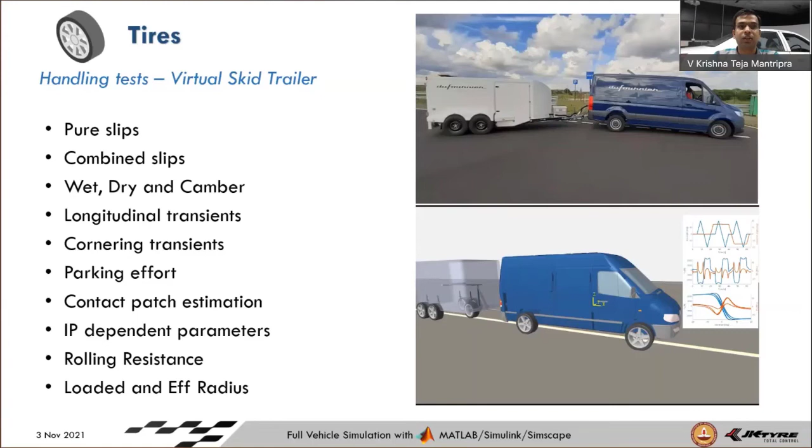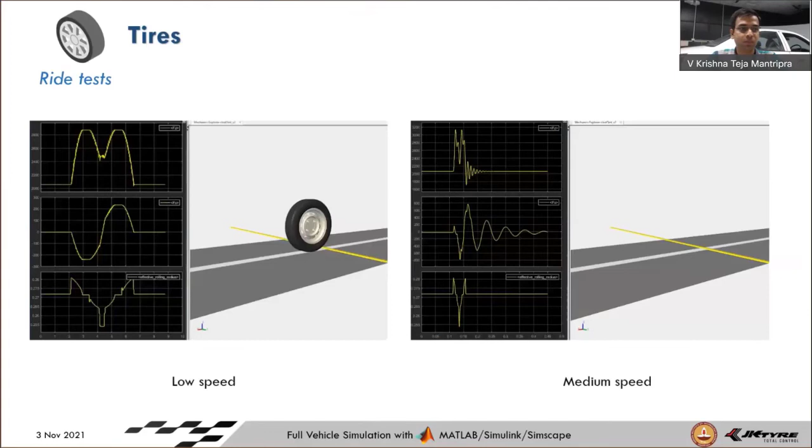So finally, if you mount different wheels, on the right side what you see is a MATLAB Simscape Multibody simulation running, and on the left side what you see is the power spectral density measured at the tire hub. It gives you a feel of how well your tire holds the road and how comfortable the driver feels riding on a specific tire.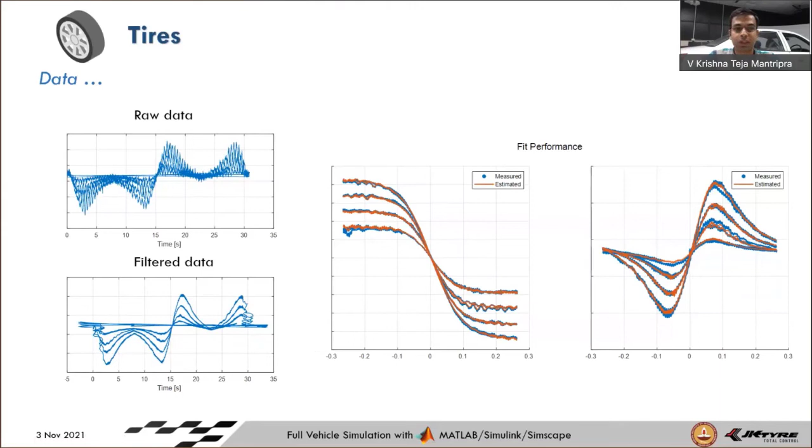But how do you get all these parameters to get your simulation started? It looks like there are hundreds of parameters; it runs basically into hundreds. Where do you get all of these parameters to kickstart? That's the next slide. From 2021b, there is an SUV tire that comes as an example. All the parameters suit an SUV tire, an SUV vehicle basically, and you can use the tire file off the shelf as is.

You might be available even for an academic pricing for that. MF eval is available on MathWorks File Exchange. It models many of the dynamics to a very good extent. It's done by Marco Furlan. It is converted into Simscape now. It is also available, so you can use the model as is. But if you're using the latest version of MATLAB, that is 2021B, neither of these you can directly use: the toolbox multi-body tire, Magic Formula tire.

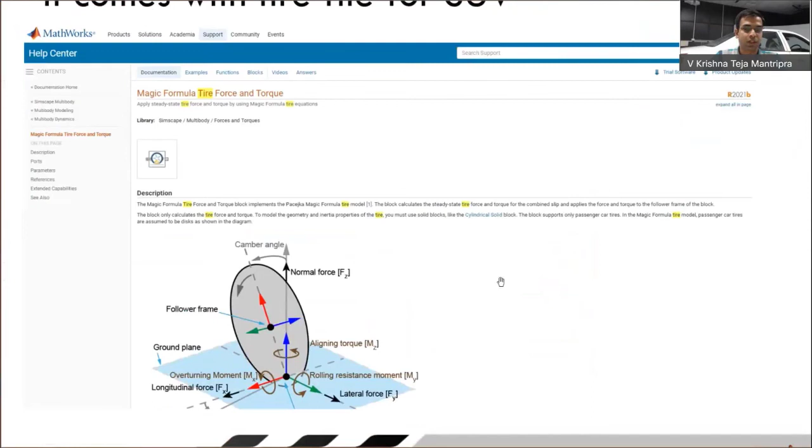So this is what I'm telling. With 2021B, you have this block coming up, which you can use off the shelf. With the parameters there, you can look up this example for the tire file. The parameters are validated for an SUV tire, and you can just take it off the shelf and use it for your simulations. So that is on the tire side. So let's go into the steering now.

Steering from the front end looks very simple. You give a rotational angle on your steering wheel and the tires move in a certain direction. But they have a very important task of giving you the feel of the road, the feel of the entire vehicle dynamics that are going on onto your hands. There are many cues that the driver feels: one is visual, one is audio cues, and the other is the haptic cue that comes from the steering. So that needs to be captured by the whole system that is running.

In this case, we are modeling a column EPS, electronic power steering, with column assist. We'll see how we are doing that. Rack has its own dynamics. Of course, suspension effects, because there are camber caster profiles which actually change tire behavior, which in turn propagates the forces and moments through the rack, through the steering columns. So that is how the steering plays a very important role in feeling the road.

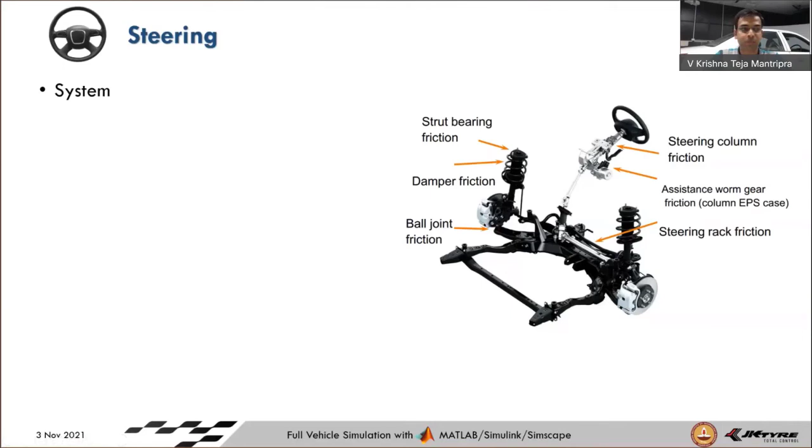But to model them, there is no friction block that is available out of the box. There is a friction block in the rotational library, but steering friction is slightly different. There is a lot of literature you can easily find in proper journals like Elsevier and so on on why the steering reflects the friction element in a different way. So this is the friction element.

To model them, you have custom Simscape language, and you can write all the equations. It's very simple. Once you write a small equation for that, other things are just integration with other blocks. So you don't have to write the full equations as described in various theses, textbooks, and research papers available online. That is a very big advantage of using Simscape. Just make the component itself customized, but the whole system is again block by block connection. Just wire them up together, and the systems are built for you by Simscape at the back end.

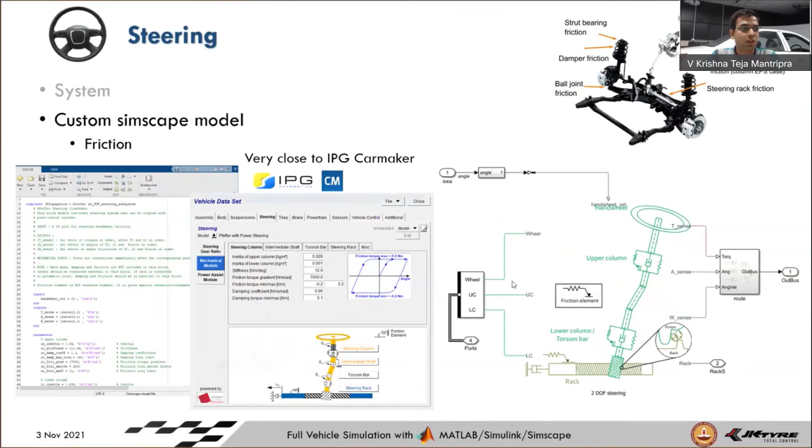So column assist is basically dependent on how much torque you sense at the torsion bar, and a current is supplied to a motor that is present in the upper column, connected by a worm gear to this column, and that is what gives an additional torque, which again propagates all the way and steers your vehicle.

Krishna, hello? Yeah. We are losing your voice actually. Hello? I think, yeah, hello. Yeah, sorry, okay. No, we were losing your voice actually. There was some network issue from your end, I think. But okay.

Fine. Okay. So should I go back and come forward, or should I continue? No, continue. There's no problem. In case it happens again, then just to save the bandwidth, you can close the video. Oh, okay, fine.

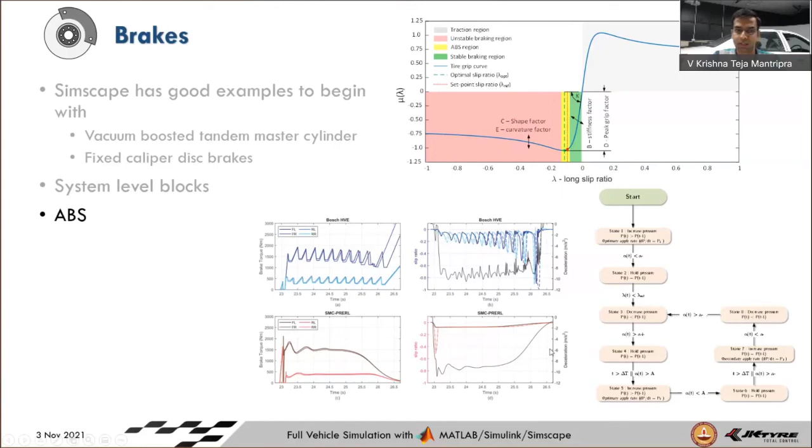And these are from one of my publications where I used a Bosch ABS. How the algorithm is, that is what is shown here. This is the Bosch flow chart. You can also use sliding mode control. Some of you in non-linear or advanced control systems might know what sliding mode control is. All the equations are there in the paper. You can find from there how these are implemented. So this is the paper.

From the previous graph, you might see that sliding mode is very smooth, but it is varying across parameters, so it is not robust. On the other hand, Bosch is fluctuating a lot, but it is robust. So just from one graph, we cannot determine. The paper has extensive coverage of how the simulations are done. It's a humongous number of simulations, more than 2 lakh simulations with combinations of tires.

That is why you need to be very careful with your tire parameters when you design ABS. If you change a few parameters, it might lead to a different behavior altogether. You might wonder your algorithm is very good, but why is the performance not good? It might relate to not using proper tire parameters.

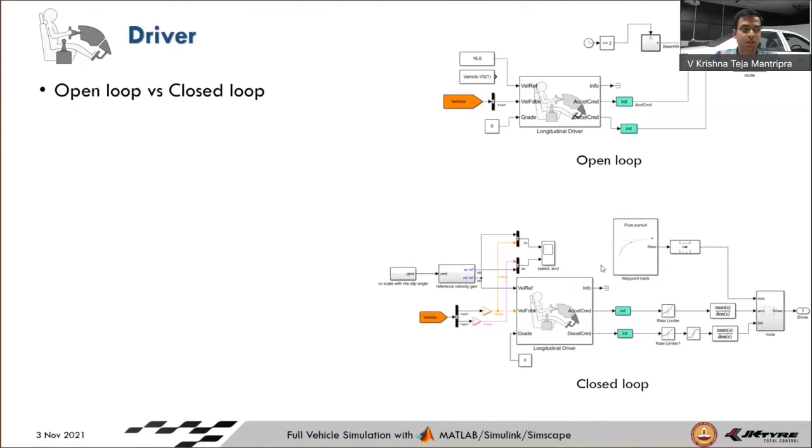Vehicle Dynamics Blockset has a longitudinal driver and lateral driver, and the Robotics System Toolbox has pure pursuit. There's a video made on pure pursuit, so you can watch the video. But how do you decide which points to follow on the path? You know X and Y coordinates, but how does it go?

So there is this MATLAB Excellence in Innovation Projects where Jacob submitted his work and won the competition. This is what I currently use. Previously I used different lookup tables and other control systems to modulate the speed according to the lateral acceleration, because in the tires we have seen the combined slips have an effect. When you brake and corner together, the tire loses control very easily.

So taking all those into consideration, we need to have the slips and speeds at different points with respect to the distance covered. But here he has used a point mass simulation. Of course, it is not accurate when you put the full tire model into that. You need to add some more control systems to tune them according to tire slippage and lateral acceleration behaviors. But this is a good starting point to develop other control systems around the existing point mass model.

If you use the point mass model, the graph generated from here will not match the full vehicle model, because here it is an idealistic one, but here you have realistic models. That is why.

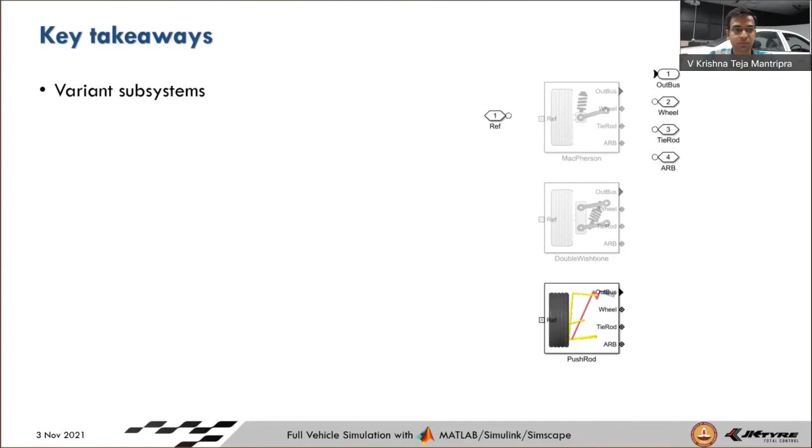So first is if you use variant subsystems, you can easily swap across them. You have block masks where you can easily switch between parameters or different variant subsystems or even change the behavior of how it is running. For example, in the tire models you have seen, by giving different changes, you are changing different parameters or different behaviors in terms of slips, dynamics of the tires and so on.

Simscape and Simscape Multibody interface. So the degrees of freedom you have, for example, revolute joints or gimbal joints or prismatic joints in terms of translation and so on. But how do you interface to a complete Simscape network? For example, the steering that I have shown is a complete Simscape network. It is connected to the wheel, that is a revolute joint, and a rack, that is a prismatic joint. So the connection is using these two interfaces.

Then you might say that some of the components are missing in the library. How do I model them? I have built the entire system on Simscape, but Simscape does not have some of them. Simscape language is very simple. The equations are the same as how you write it in normal MATLAB scripting or Simulink blocks, the same thing, but you have additional units.

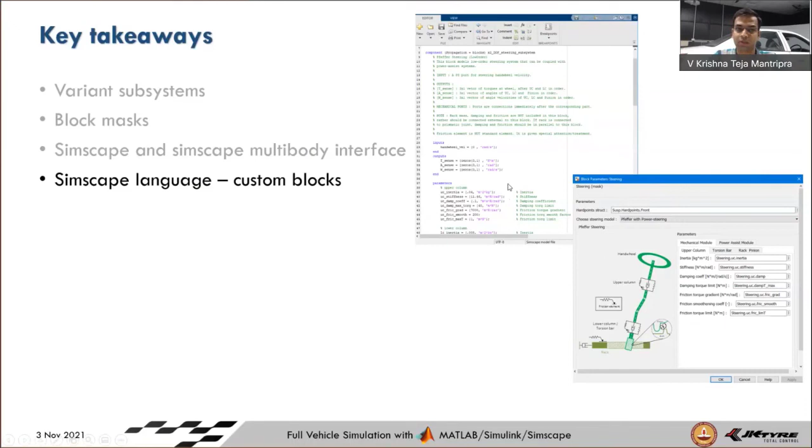They are having power equations in between. Through and across variables need to be properly taken care of. Once you are taking care of those things, the equations are pretty much simple and clear. You have all the dynamics that can be accounted for. So you can even model forward and inverse dynamics with the Simscape blocks.

What I mean by forward is, in the electronic power steering case, what you have seen is I give the forward torque in terms of current. So I'm giving the force, that is the cause, and I'm sensing the effect, that is the rotation of the mechanical components. In the other case, in the steering, I'm giving the steering wheel angle, because that is what I can calculate. And I want to sense the torque, that is the cause.

The effect is the steering angle, obviously, because when we drive, we give only the angle. We do not worry about the torque that we give. So I give the angle here, and the components have the capability to give out the corresponding torque as well. So that is possible for each and every degree of freedom in Simscape. So that is a very big advantage in terms of both forward and inverse dynamics.

Finally, data and parameters are the currency for all the simulation that you have seen till now. Any slight mismatch in parameter, for example, in this case, you might target a certain lateral acceleration. Your system is very good. I mean, the simulation model is modeled very nicely. Everything is perfectly fine, but you never reach the 4 meters per second squared. You're stuck at 2.5 or 3. It is because some parameters are not proper.

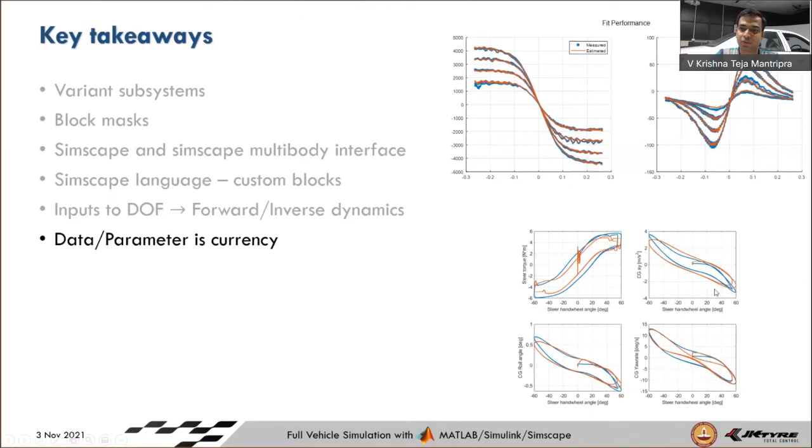In this case, for an SUV, I'm using a hatchback tire. So you can never expect the performances will match. Even the other side, on a hatchback, if you put an SUV tire, you will feel a lot of inertia, and the problem is you'll have too slow transients, because you cannot produce such kind of torques with a small hatchback. So that is a very simple use case with respect to tires that is valid for all other subsystems as well.

So putting all the pieces together, on the left we have an SUV which is fully validated with all the experimentation that we have seen previously. That is the steering robot, RT3000, and LVDT sensors for suspension, K&C measurements, and so on. All of them are validated on this SUV, and that is why you'll see it kind of magic.

On the right side, it is basically guesswork of many parameters. The CAD you see is for a race car, but the tire is a hatchback tire. So performances will not match. Let's run the simulation and you will be able to see the difference. Let's go with the SUV first.

I'm doing a double lane change, open loop. So the driver does not control the speed while the maneuver is going. It does a pretty good job on the left side, because it's an SUV and I'm putting an SUV tire, the same tire that you get with the latest release of MATLAB.

Right side, I'm using a 13-inch or a hatchback tire, that is a smaller tire, because it should match the height of the tire. So let's say I'm using a smaller tire, but its characteristics are completely different. So it accelerates, but nothing much is going to happen. It will go out of the path. So many cones are hit in this case. If you reduce the speed, yeah, it does a good job.